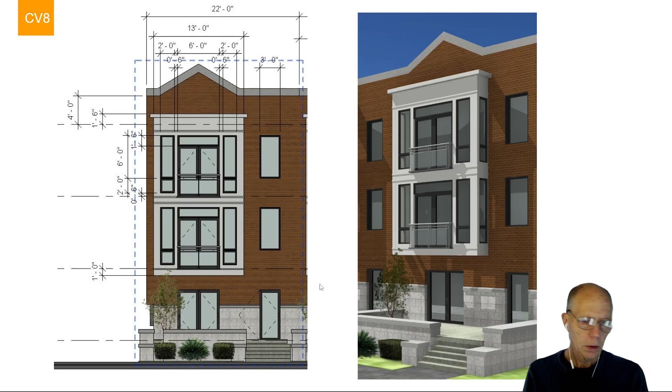This is a 6-foot transom window. These windows are 2 foot wide, and they're set like 6 inches away from the main doorway. So we'll go out to Revit and go to the south elevation, and let's start getting some components in here.

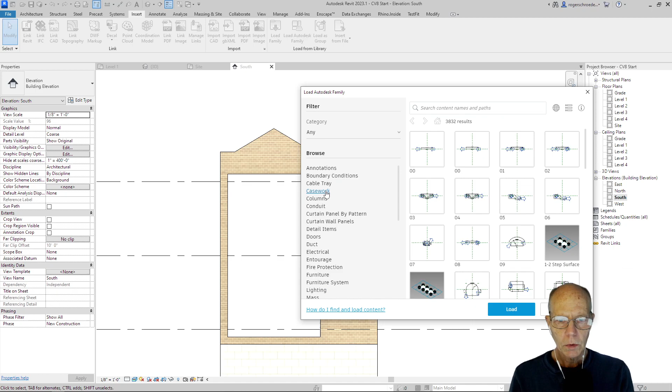Right away I want to go to Insert and load in that double door. I'm going to go to the Cloud, Load Autodesk Family, and we'll go to Doors, and Door Double Glass, and we'll load that in.

Let's go ahead and use the largest one they have here, the 72 by 84, and place that. Let me place the door right on that level. And you'll notice I've got it lined up for 6'3" by 6'3", so it says it's centered in that opening.

I'll click. And our trim's the wrong color. We want that to be a dark color, so actually we can go ahead and do that right away. I'm going to go to Edit Type.

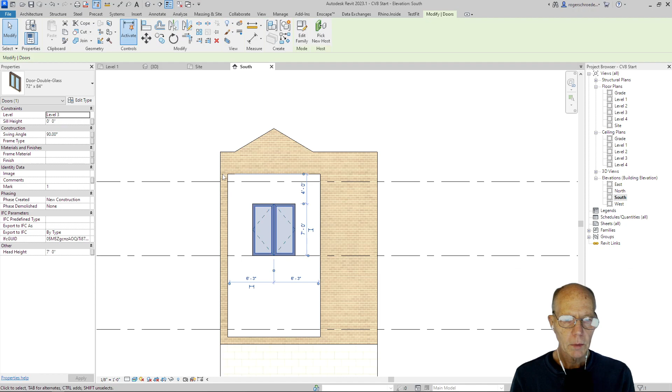You'll notice I have this birch stained. Let's click on that, and it'll allow us to open up a new, create a new material. So I'm going to create a new material, right click to rename it, and call it Trim Dark. I hate when I do an extra capital.

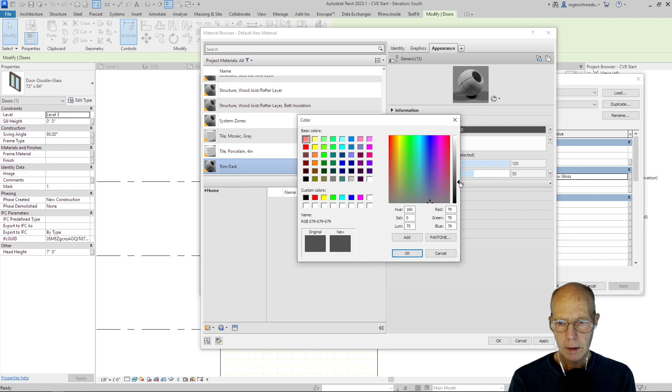Let's select a color that is not completely inky black, so it throws a little bit of light off of it. There we go. And say apply, okay. So that's just the trim dark, and then we'll also put the same trim metal here.

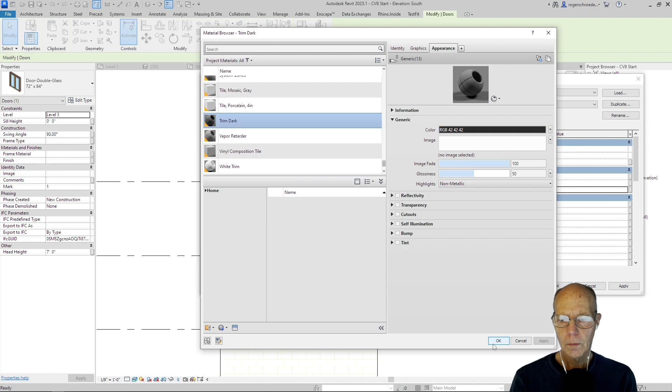Okay, and then we have our dark window. So we need a little 2x2 fixed window down below. Let's see if those are already loaded in. Fixed windows are already loaded in, I believe. If not, you'll have to go out to the Cloud and load them in. But I think they come already packed into Revit.

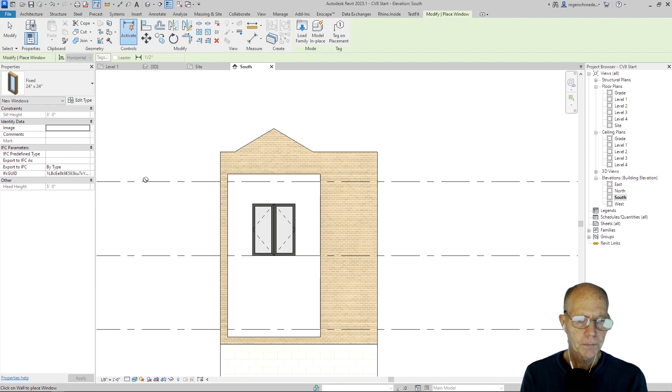So I'm going to grab a 24 by 24 inch, and we go ahead and place this. I'll just randomly place this now because we really want to organize where it sits. Let me just zoom in here and see if we can use our tools here.

Let me pull this over, and then we can set that for 6 inches. The other way to do this is just to set it down in the corner and then use the move tool. So that sets us 6 inches that way. I'm going to come down here and click and set this for 6 inches, and that positions it.

So anytime we want to move these lines, we can grab these witness lines and then reposition them to go to any place on our object that we want to go. So that's our positioning of our window, 6 inches off.

Let's go ahead and edit this type. We'll leave this one as the fixed 24 by 24, but let's go ahead and edit the sash color and make that our dark trim. Sorry, I'm skipping by that quickly.

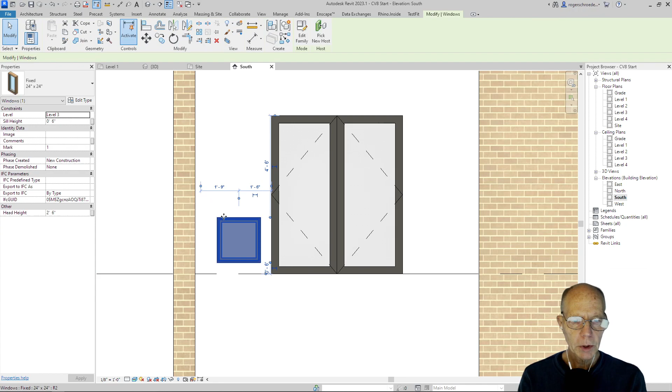Okay, and then actually we could duplicate this one, and then we're going to make a copy of it, we'll move it up, and let's go ahead and modify this one, edit type, and we'll go to duplicate, and we want this one to be 24 by, I think it's 6'6", so that would be 78 inches.

And I believe that our default sill height is going to be 2'6" because we now have that 2-foot window that was 6 inches up above. The height of the window, we want to be 6'6". I kind of know this.

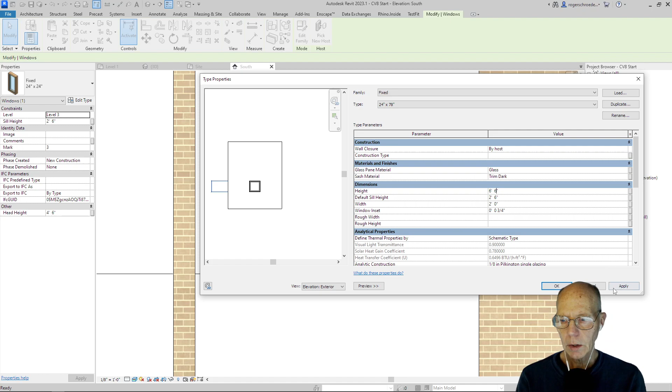This is going to actually include the transom that we're going to do, so you just input that number right away. And the width will stay the same, so we'll click apply and OK. And now it looks like it's really tall, but we're going to make a 2-foot transom window over here.

So I'm going to actually grab this window again and copy it over, and we're going to modify it. So we'll grab it, go to edit type, and we'll duplicate it, and we'll call this 24 by 72, and we'll call it transom.

Now our dimensions are flipped around here, so our height is only 2 foot, 0, and our width is 6 foot.

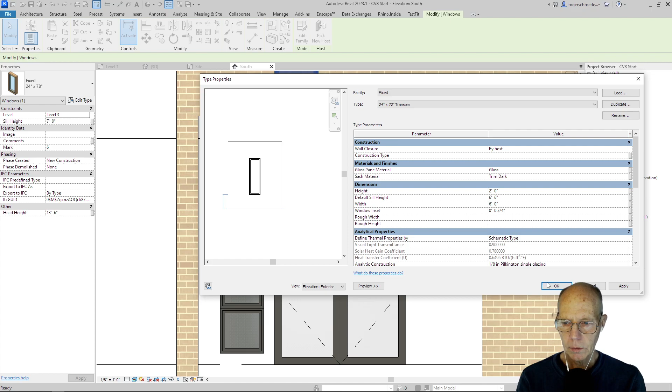And our default sill height is, I don't know, we'll just guess at it. And it looks pretty good. So I'm just going to move it over into position.

And we look at this at a 3D view to see how things are coming along here. That all looks pretty good to me. Let's do a little rotating here. Looks like these windows are opening out.

We're going to put what's called a Juliet balcony. There'll be no room for the windows to swing, the doors to swing out. So I'm just going to hit the space bar and face those in.

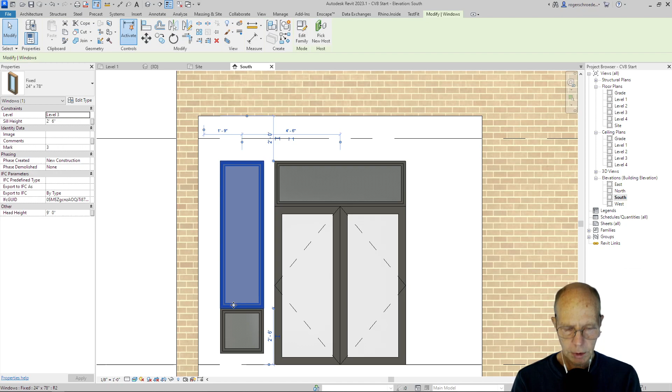And then we'll go and mirror these windows, these two windows here, by selecting them both by holding the control down, and then using the mirror command and finding the center.

And it looks like we need a little railing now in front of this, so I'll go to, we're up on the top level there, so I'll go to level 4, I think it is. Nope, how about level 3, excuse me, where we can see the door, and now we could actually add a little balcony.

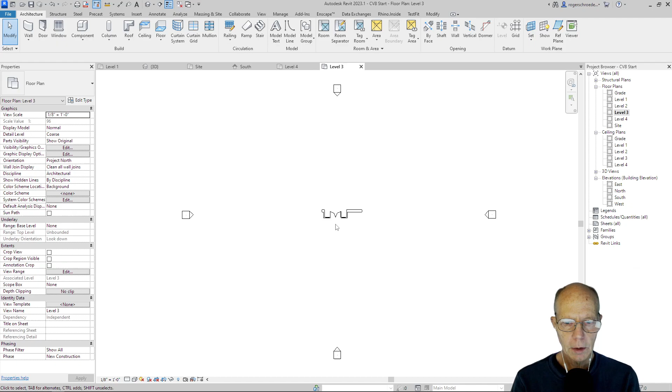We know how to do railings, so I'm going to go to railings, sketch a path. We're going to select a glass panel one because it's nice and fancy. And I'll just draw us a little sketch here.

So we'll come out 6 inches. We'll go across our, doesn't look like I'm getting good hinting here. There, oops, there we go. That's our 6 foot length. I'm not seeing that highlighting, and then I'll come back to 6 inches with that.

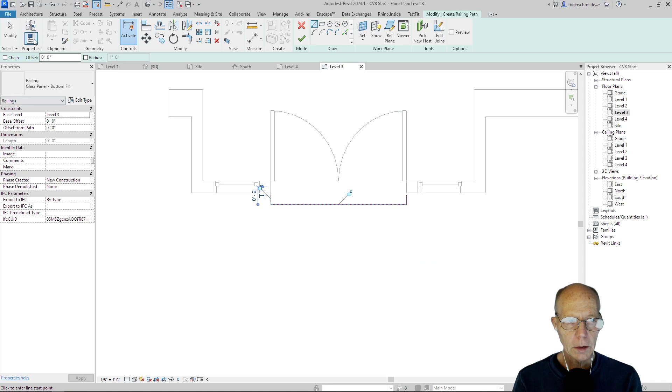I see, I was not in continuous drawing mode. So let me just draw this line back again. And this line I need to correct because I didn't touch back to the building. All right, so that's complete.

Let's take a look at what that looks like. There's our railing, but we seem to need a little bit of a floor under that. So let's actually make a special kind of a floor.

So I'll go back to level 3 where we're going to build that floor. I'll grab the floor tool. And we have generic here. I'm going to go to edit type and make a duplicate so we can make a special balcony floor.

Excuse my mouse there. And we'll call this balcony.

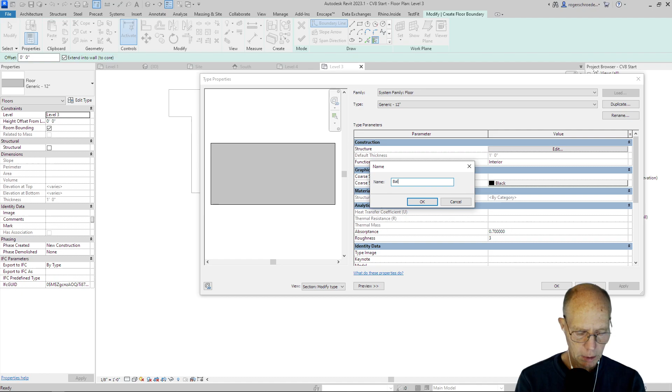And we'll go to edit the structure. And we don't want it to be a foot thick. Let's make it just 3 inches thick. And let's give it a tone. Let's give it the white trim.

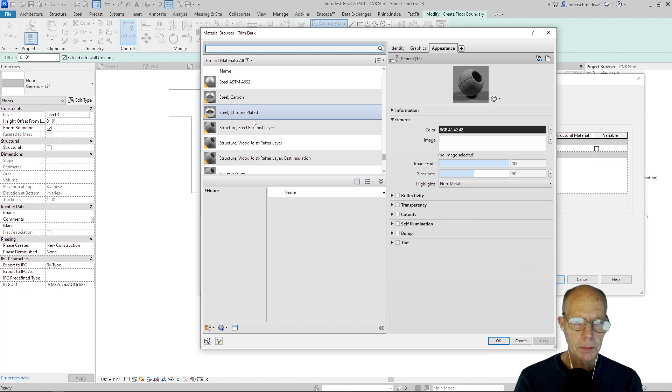I forgot what we called that. It was probably white trim. Okay. And we'll go okay.

And okay. And now we actually have to draw that floor. So we want it on level 3. And I'm just going to come over to the edge of the doorway and over to the edge over there.

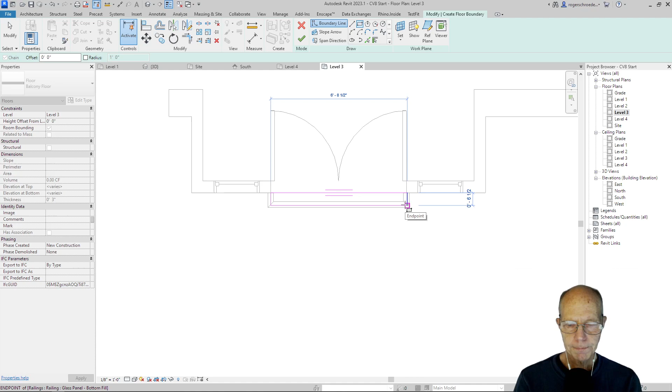And we'll come out the full width. Let me go ahead now, and I just clicked that selected, but let me just pull this over until I connect to that edge. That's good enough for this as far as our level of precision.

Let's take a look at that in 3D view. That looks pretty good.

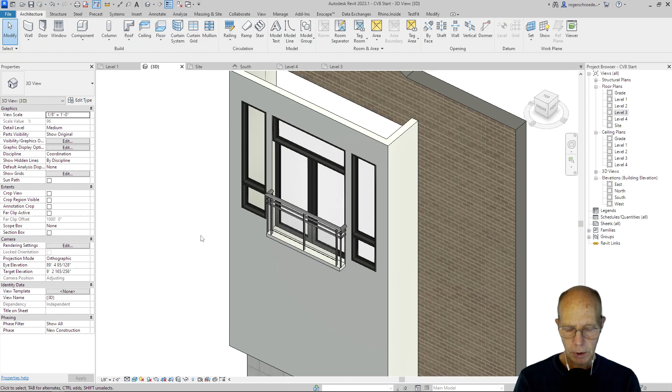Okay, so now we have that set for one of the top floor. And now what we need to do is just copy all those elements down. So I'm going to draw a box over them and use my copy tool.

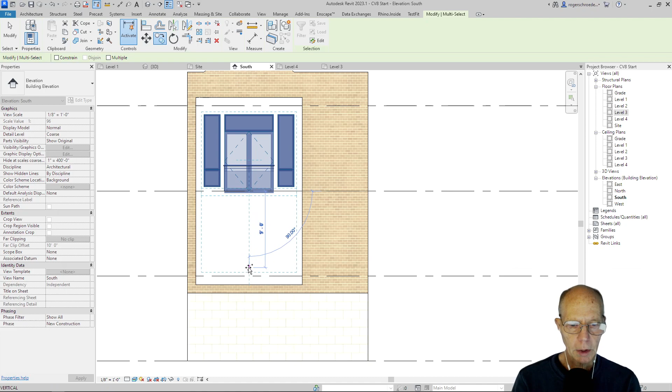And I don't want it multiple, but I just grab any point and I'm going to just pull down until this 10 foot because that's our level to level. And we'll just review that again in our 3D view.

So we're moving along really quickly here. I hope you were able to follow that comfortably. Let me know in the comments if I was going too fast or too slow. And we'll look at sweeps next.